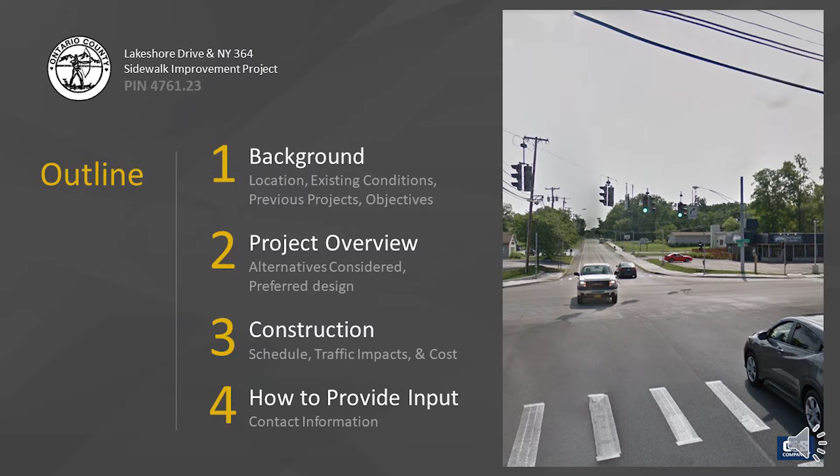This presentation will start with an overview of the background and purpose of the project. There will then be a discussion of the evaluated alternatives, followed by a detailed look at the proposed design. We'll also give you information on the anticipated schedule, show you how the area will be affected during construction, and provide a breakdown of the estimated construction costs.

As the area surrounding Finger Lakes Community College and Constellation Brands Marvin Sands Performing Arts Center has grown, so too has the need to accommodate the traffic generated by these destinations. A study was completed in 2013 by Ontario County identifying potential improvements to the area that would provide safe and accessible facilities that encourage alternative forms of transportation. The 2013 study provided a variety of recommendations for these improvements. This project is part of the continued implementation of these recommendations, which are being designed and constructed as funding becomes available.

The project site is located just north of the Community College and Performing Arts Center and south of New York Route 5 and 20. Improvements are proposed along Lakeshore Drive between New York Route 364 and New York Route 5 and 20, and New York Route 364 between Lakeshore Drive and New York Route 5 and 20. These segments fall within the town of Canandaigua, town of Hopewell, and the city of Canandaigua. Lakeshore Drive is maintained by Ontario County. New York Route 364 is maintained by the New York State Department of Transportation.

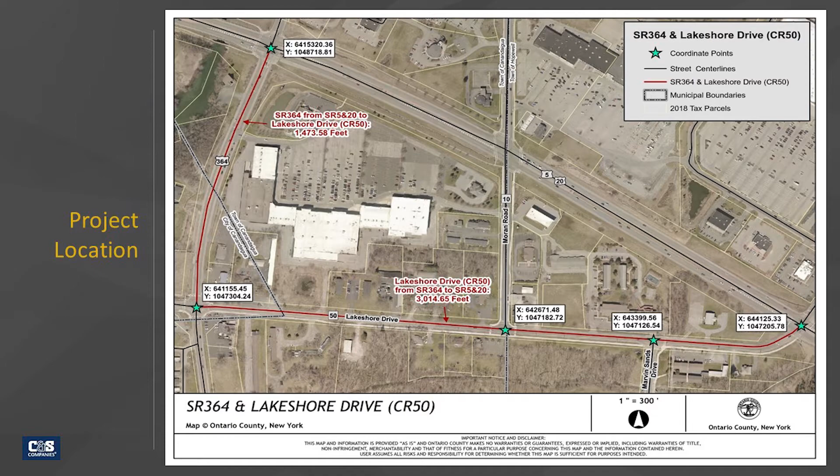New York 364 is classified as an urban major collector. There is one through lane in each direction with several turn lanes in advance of intersections at Lakeshore Drive, Roseland Park Plaza, and routes 5 and 20. Some pedestrian accommodations do exist at the Route 5 and 20 intersection, although the equipment is antiquated, and new pedestrian signals and crosswalks were installed at Lakeshore Drive in 2017. However, the majority of the segment has no facilities for pedestrians.

Lakeshore Drive is also classified as an urban major collector with primarily one lane in each direction. The segment between New York Route 364 and routes 5 and 20 is approximately 3,000 feet long with 11-foot travel lanes, and shoulder widths vary between 2 feet and 5 feet. New sidewalk was installed on the south side of the road in 2017, but there are no pedestrian accommodations on the north side of the road.

At the time of the Ontario County study, minimal accommodations were provided for pedestrians within the project area. No sidewalks were present along Lakeshore Drive or New York Route 364. Pedestrians and cyclists used the narrow and deteriorating roadway shoulders of Lakeshore Drive. And while New York Route 364 provided wider shoulders, pedestrians could catch vehicles by surprise on dark, unlit streets. These conditions are still largely present today. Additionally, the only intersections with signalized pedestrian crossing were located along New York Route 5 and 20. One mid-block crossing was located at the intersection of Marvin Sands Drive and Lakeshore Drive.

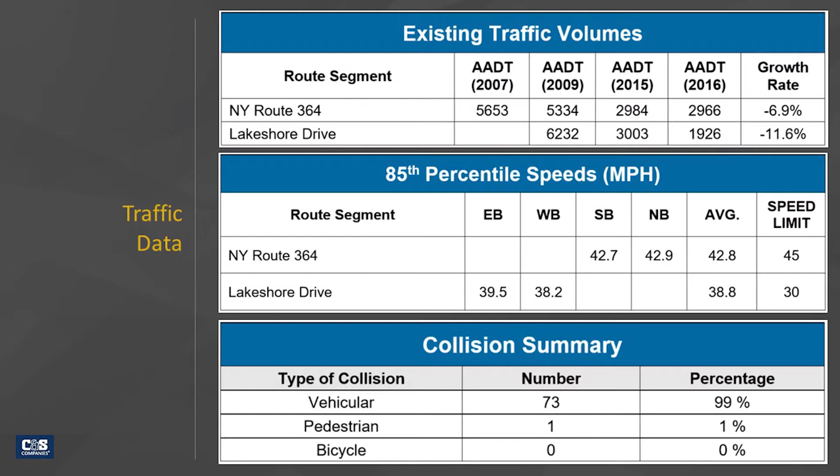Of the accidents that did occur, only one involved a pedestrian. The accident took place at the intersection of New York Route 364 and New York Route 5 and 20, while the pedestrian was within the crosswalk. The pedestrian did sustain injuries, but survived the incident.

The first phase of improvements to the project area was completed in 2017 under the Lakeshore Drive and Moran Road Sidewalk Improvement Project. This project installed sidewalk and pedestrian level lighting on both sides of Moran Road and the south side of Lakeshore Drive between New York Route 364 and Routes 5 and 20.

Pedestrian signals and facilities were installed at the New York Route 364 and Lakeshore Drive intersection. The intersection was updated to provide ADA-compliant curb ramps with detectable warning units, striped crosswalks, and push-button activated audible pedestrian signals.

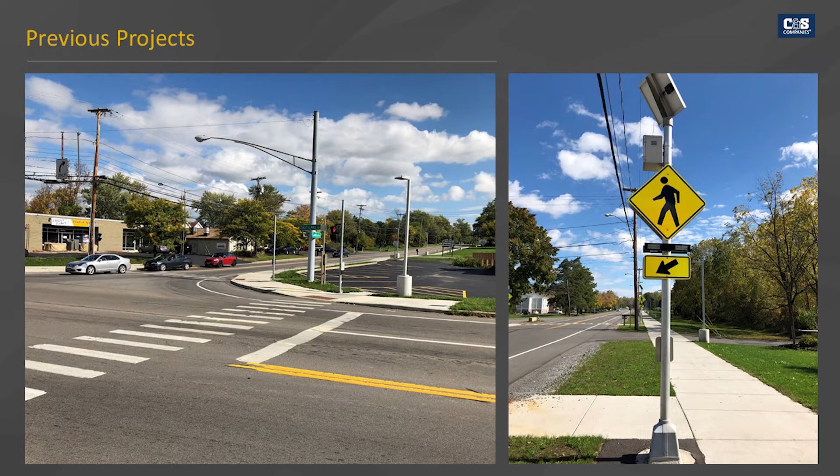The project also installed mid-block striped crosswalks with rapid flashing beacons crossing Lakeshore Drive at Moran Road and Marvin Sands Drive. These rapid flashing beacons are activated upon pressing the buttons located at the crossings. When activated, the beacons have alternating flashing lights that alert vehicles to pedestrians using the crossing.

Even with the addition of sidewalks and other amenities under the Lakeshore Drive and Moran Road sidewalk project in 2017, the project area is still in need of improvement from a pedestrian perspective. There are large gaps in the sidewalk network within this busy area surrounding the Community College and Performing Arts Center. With the high volume of pedestrian traffic in the area, there is a lack of pedestrian level lighting, and much of the pedestrian infrastructure near Routes 5 and 20 is antiquated and does not meet ADA requirements.

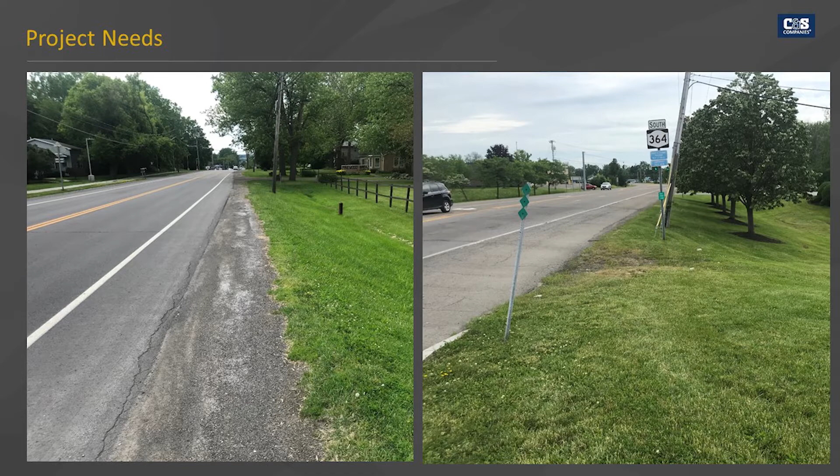The purpose of this project is to improve pedestrian safety and access by expanding the sidewalk network, installing pedestrian level lighting, and providing pedestrian signals at all signalized intersections. Some more detailed objectives are filling the gaps in the existing sidewalk network, updating existing facilities to meet ADA requirements, providing crosswalks and signals where needed, improving safety through pedestrian level lighting, controlling driveway access to limit conflicts with pedestrians, and minimizing impacts to the environment and property owners.

With the intent of improving the existing conditions and capitalizing on the success of the Lakeshore Moran project in 2017, Ontario County prepared an extensive application for the New York State Department of Transportation Transportation Alternative Program and Congestion Mitigation and Air Quality funding. Due to the county's diligence in completing a comprehensive application, they were awarded $1.81 million in federal funding. The 1.81 million serves as 80% of the total project cost, while Ontario County will provide the remaining 20% of the projected funds.

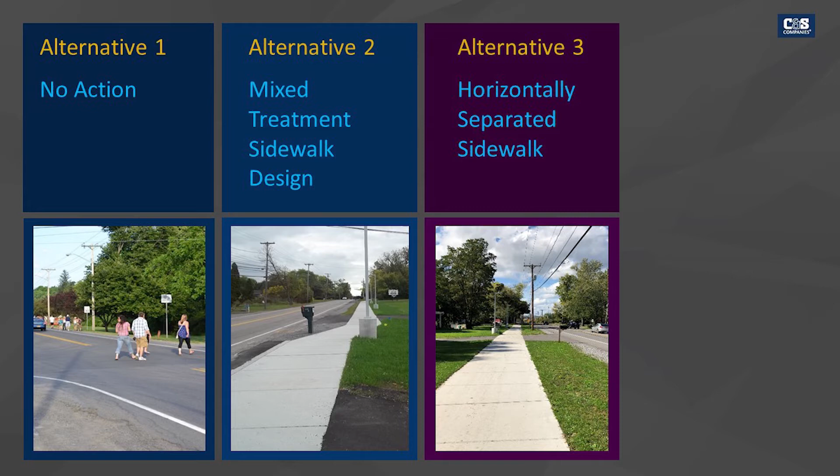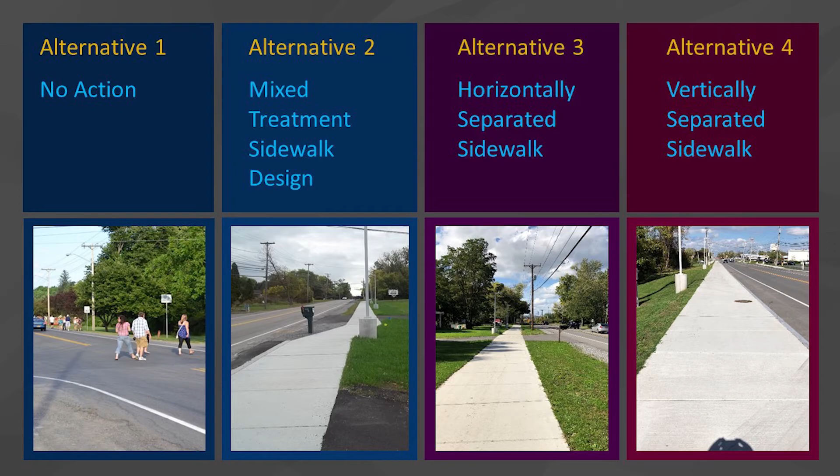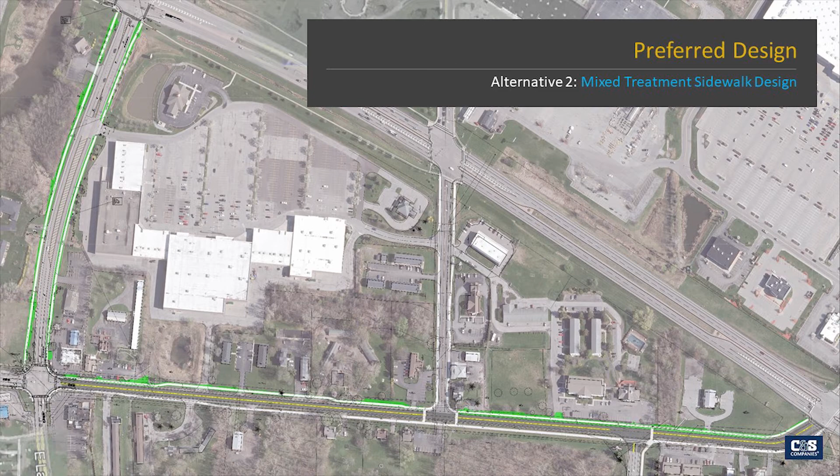Vertical separation through curb was utilized in the preferred design in locations where there is limited right-of-way available or impacts to existing features needed to be avoided. After an evaluation of the alternatives, it was clear that the best option was the mixed treatment approach of Alternative 2. The proposed work will tie into the previously installed improvements and complete the sidewalk network in the area. Let's take a more detailed look at the chosen design alternative.

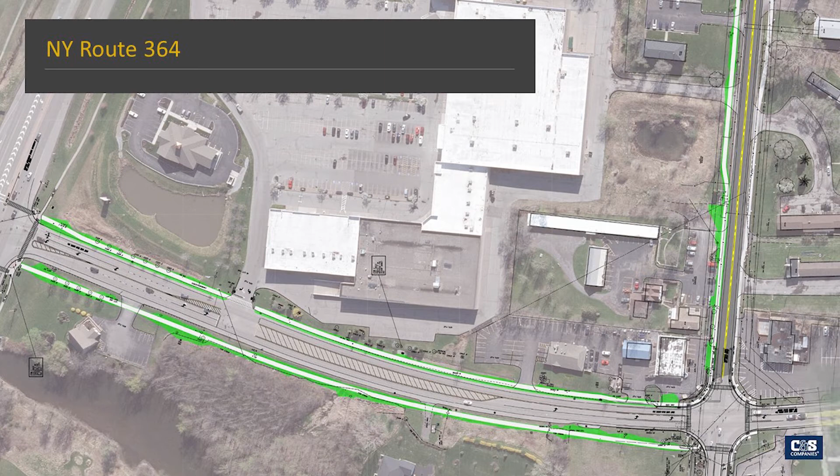An 8-foot sidewalk is proposed for both sides of New York Route 364 and will be separated from the street by a grass buffer. The grass buffer will vary between 8 feet to 16 feet wide on the west side of the street and typically be 5 feet wide on the east side. Pedestrian level lighting will be installed along the full length of sidewalk on both sides, as shown in the video.

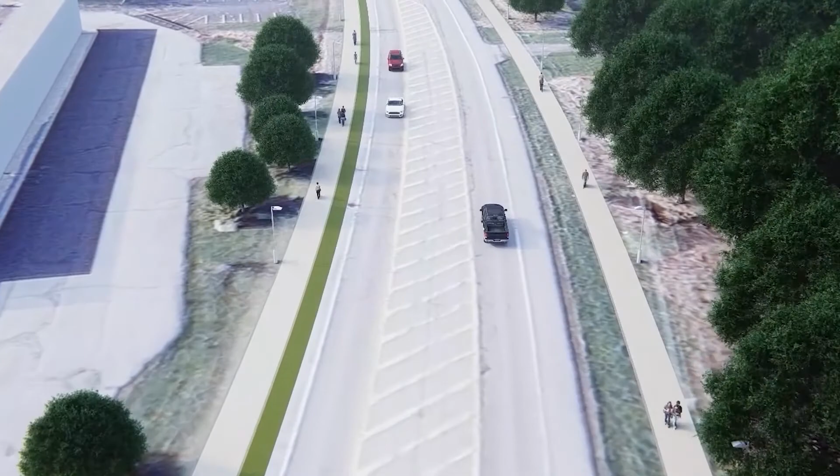In order to achieve the 5-foot grass buffer, the project will reduce the northbound shoulder width of New York Route 364 from 9 feet to 5 feet. Since parking is already prohibited along this segment, the existing wide shoulder only serves as a pull-off area for disabled vehicles. A 5-foot shoulder width is recommended by the New York State Highway Design Manual to accommodate bicycles. This reduction is required to minimize the need for right-of-way acquisitions and reduce impacts to existing drainage ditches. Right-of-way acquisitions will still be required from properties that make up the Roseland Center Plaza.

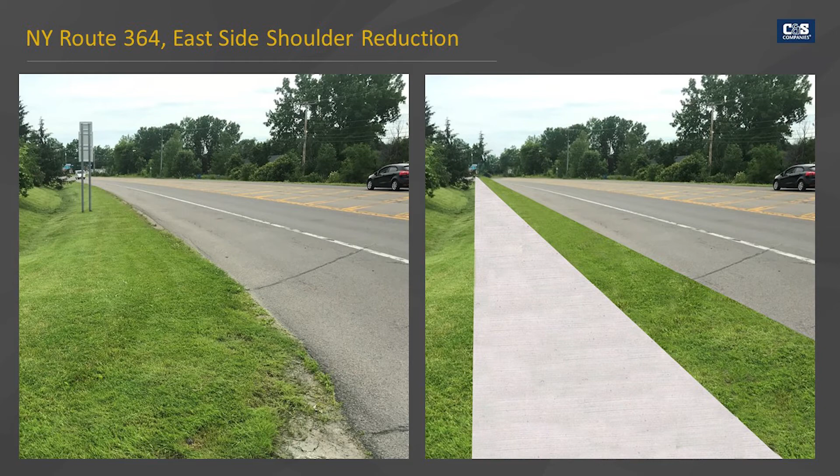Pedestrian signals will be installed at the Roseland Center entrance to aid pedestrians in the safe crossing of the driveway. Pedestrian signals will also be installed at the intersection of New York Route 364 and New York Route 5 and 20 to accommodate pedestrians crossing east-west across the southern leg of the intersection.

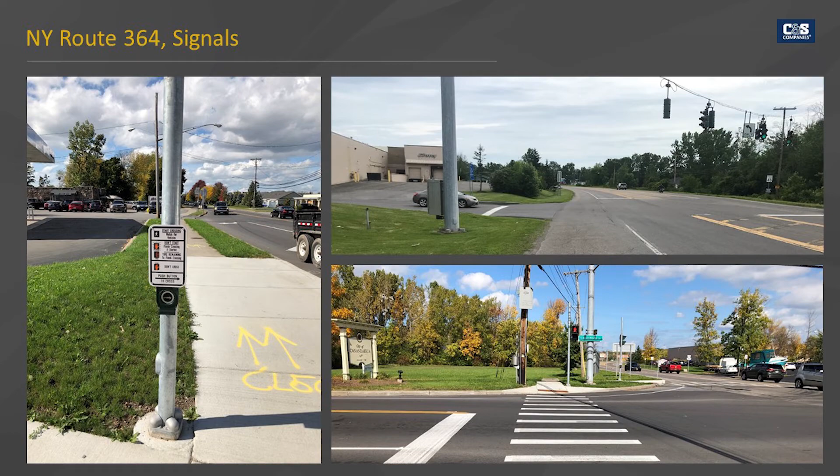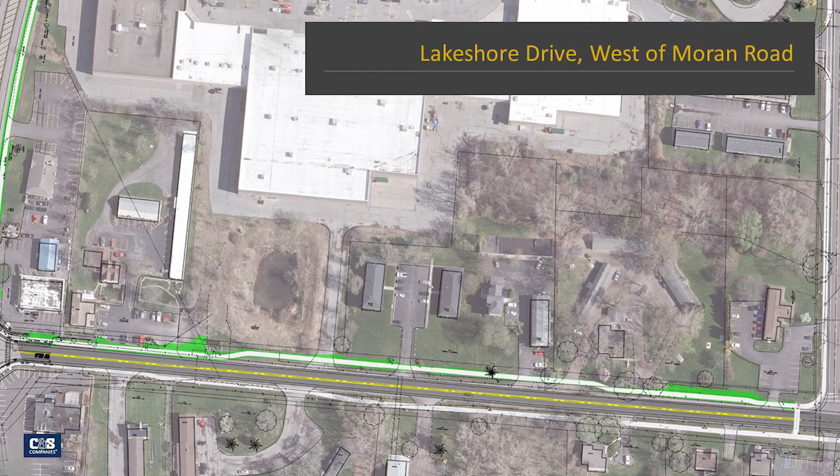Similar to New York Route 364, an 8-foot wide sidewalk will be installed with a grass buffer along the north side of Lakeshore Drive between New York Route 364 and Moran Road. The sidewalk will continue through private driveways, and the driveways will be repaired to minimize abrupt changes in slope. Pedestrian level lighting will be installed along the full segment length, as shown in the video.

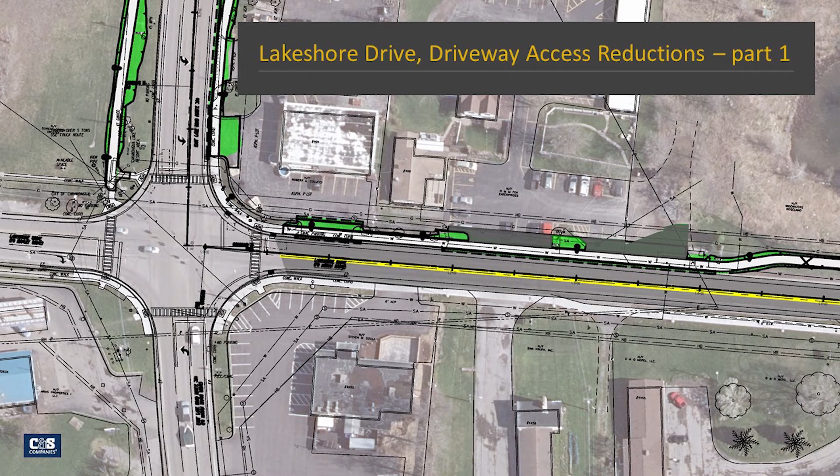Near the intersection of New York Route 364 and Lakeshore Drive, 2 reductions to driveway access are proposed. The first consists of eliminating the driveway of the corner property, home to Finger Lake Pools and Spas, along Lakeshore Drive. This is required due to the physical limitations of the site and the necessity for the sidewalk to meet the requirements established by the Americans with Disabilities Act. Access to the parking lot will still be available from New York Route 364, and there will be no reduction in available parking.

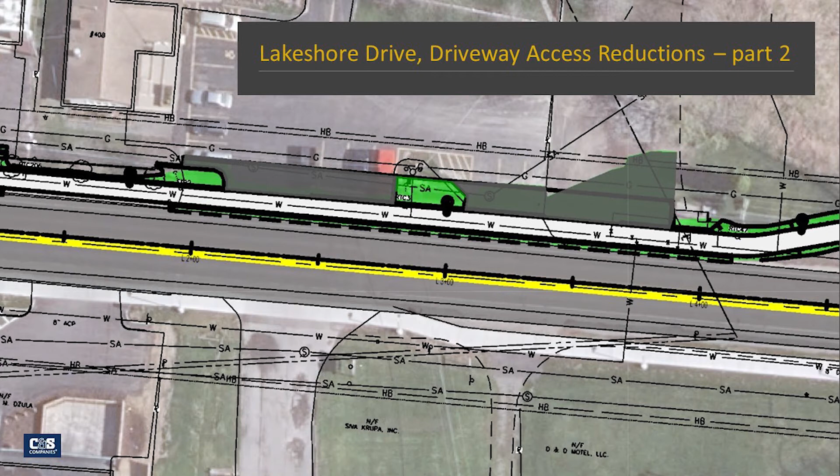The second reduction will be at the adjacent property of Lafayette Restaurant. Currently, the parking lot has no physical barriers or separation from the roadway. This provides a very long stretch where vehicles could potentially either exit or enter the lot unexpectedly. Access to the parking lot will be reduced to two 34-foot wide driveways. The parking lot will be separated from the roadway by concrete sidewalk, protected on both sides by concrete curb.

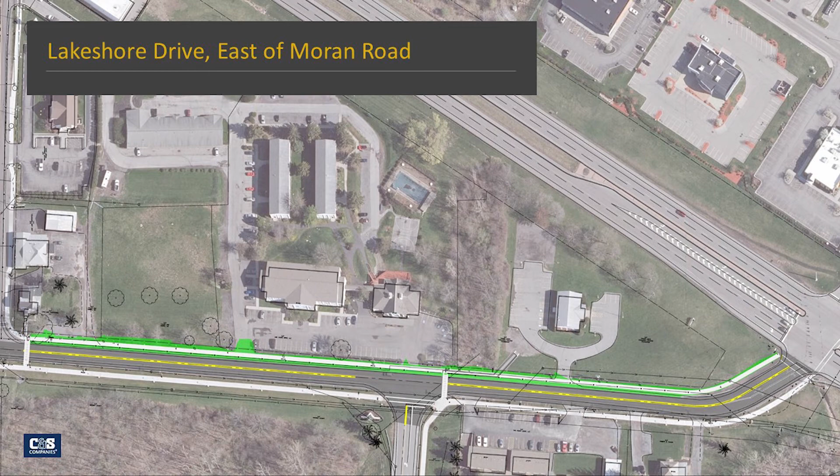For the segment of Lakeshore Drive between Moran Road and New York Route 5 and 20, physical constraints and limited right-of-way availability prohibit the sidewalk from achieving the horizontal separation necessary to improve safety. To achieve the level of safety targeted by this project, sidewalk will require the installation of granite curb and a reduction of the proposed sidewalk width to 7 feet. The installation of curb will require a widening of the roadway shoulder from 3 feet to 5 feet to meet the recommendations established by the New York Highway Design Manual.

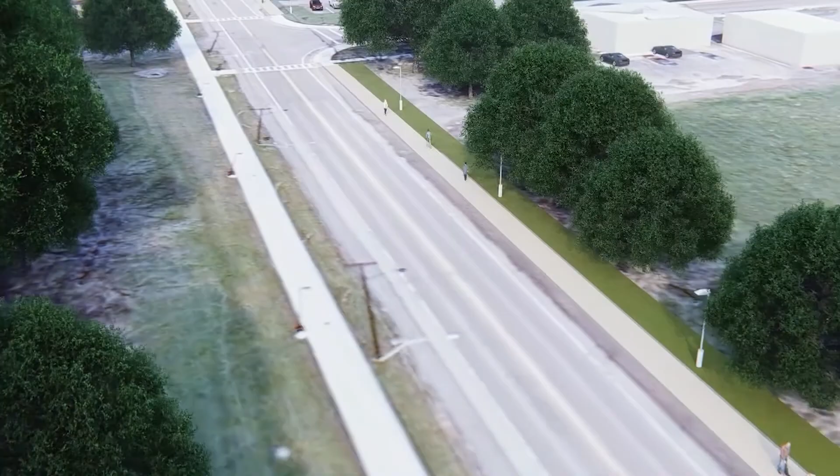Additionally, the existing closed storm sewer system will need to be extended to include the newly curbed area. Pedestrian level lighting improvements will continue along this full segment, as seen in the video. A pedestrian signal will be installed at the intersection of Lakeshore Drive and New York Route 5 and 20 to accommodate pedestrians crossing Lakeshore Drive. No new pedestrian signal will be installed crossing New York 5 and 20, and those attempting to do so will need to use the existing signal and crosswalk on the southeast side of the intersection.

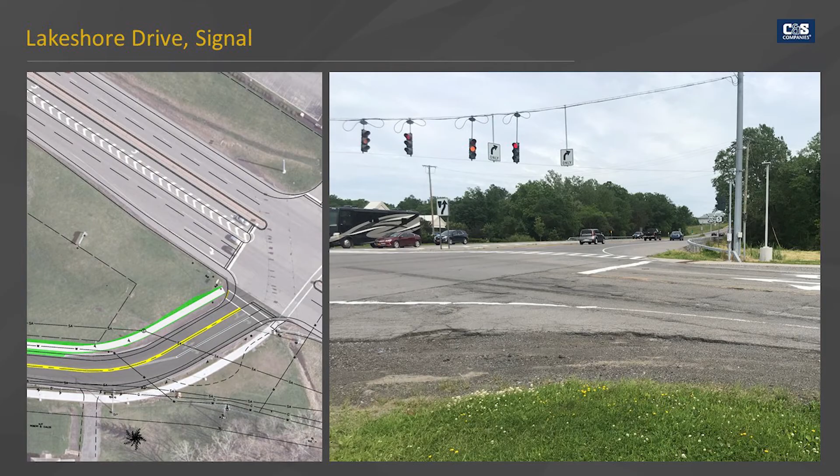The property acquired will total approximately 1/20th of an acre. The acquisitions are necessary for the installation and future maintenance of the sidewalk. Ontario County has begun to personally reach out to affected property owners, and they should expect to be contacted by the county's real estate experts in the coming months. All acquisitions will follow the provisions of the Uniform Relocation Assistance and Real Property Acquisition Policies Act of 1970 to ensure compliance with federal law and fair compensation.

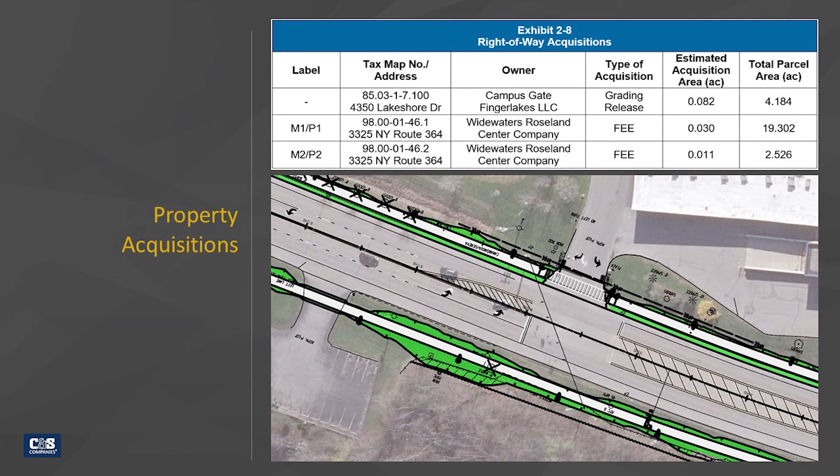In addition to the permanent acquisitions, a grading release will be required at the Campus Gate property on Lakeshore Drive. A grading release will allow work to be performed on private property for the betterment of personal property for work that is not strictly necessary for the completion of the project. Work proposed under the grading release will include the regrading of driveway entrances to avoid abrupt changes in pavement slope.

We will now take a few moments to discuss the project schedule, traffic impacts, and construction costs. The preliminary design began in late 2019. The most up-to-date public documents have been made available online for review and comment. After all comments have been received and addressed, Ontario County will begin development of detailed plans and specifications in the summer of 2020. Construction is anticipated to begin in April 2021. Items critical to maintaining this schedule include completion of the property acquisition process, obtaining necessary approvals from the New York State Department of Transportation, and the completion of private utility relocations. These activities are expected to be completed in early 2021, ahead of construction.

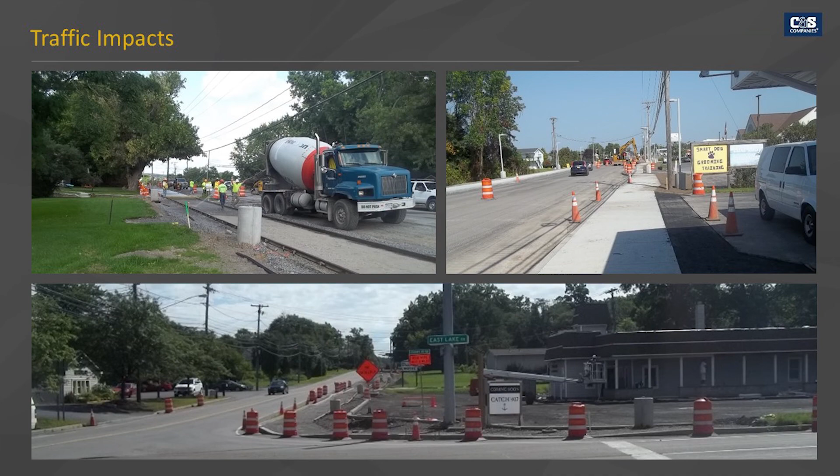Construction will require temporary lane and shoulder closures. A minimum of one travel lane will be available at all times with alternating traffic. Two-way traffic will be restored at the end of each workday. Sidewalk closures may persist for multiple days to allow concrete to cure. On days when the community college or performing arts center will be hosting events, construction will shut down early to avoid impeding event traffic or generating additional hazards.

The estimated construction cost is $1.88 million. The project is funded with 80% federal dollars and 20% county dollars. The construction cost estimate will be continually refined as the project moves from the preliminary design phase into the detailed design and ultimately to contractor bidding.